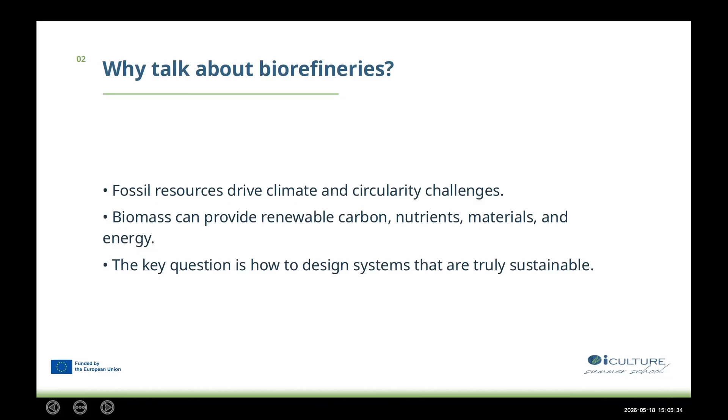We want to move to bio-based resources. Biomass can provide renewable carbon, nutrients, materials, and energy. I'm going to show you how it can be done, but there are challenges related to that.

If you look at biorefineries, a common biorefinery produces a cascade of products, if you want, everything from gas to petrol, to asphalt we're using in the roads, to insulation of roofs, to home gas, etc. It's made by fractionating, so it's a well-established old process, and we know exactly how to fractionate it and make the cascade product. So you don't only produce gas fuel or petrol from crude oil, you produce a range of products.

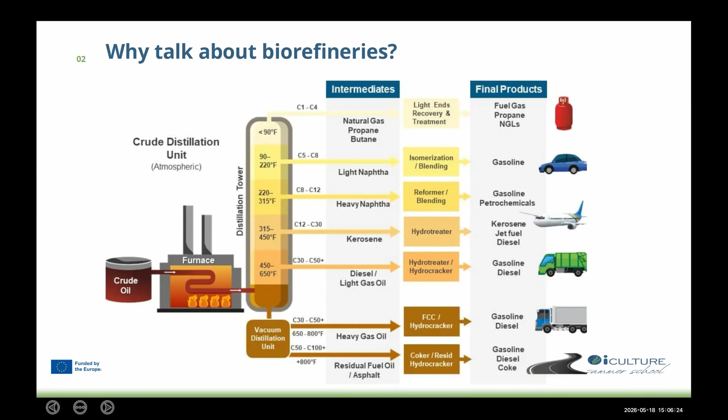I know at least two, one in Norway and one in Finland, but there are a lot of them in Europe that convert biomass into energy. They make bioethanol, we know that. What you really want to do is achieve the same effect they have in oil refineries, in fossil fuel refineries, crude oil refineries. You want to have a range of products.

So basically, replacing fossil carbon is necessary, but not sufficient for sustainability. If you want sustainability, you cannot just convert biomass to energy, as I showed you here. You want to have a cascade of products. I'm going to talk about that soon.

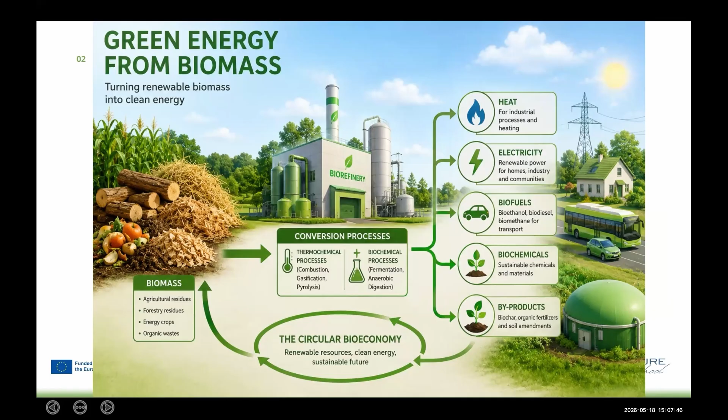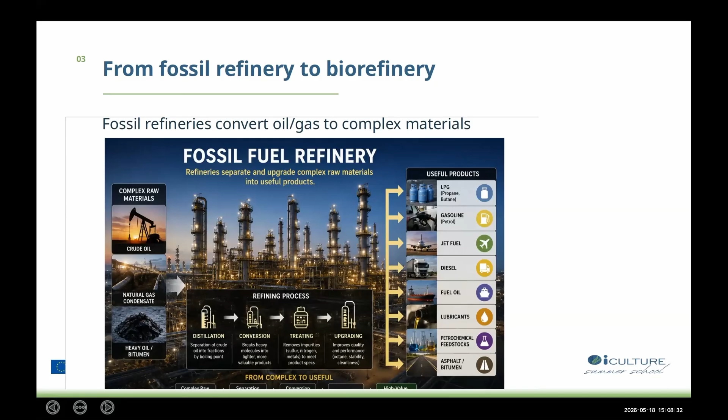So there are tons of challenges, and I'm going to mention the most important ones when you convert biomass to energy, and not only to energy—that's only one part. You have loss of habitat and deforestation. It's known that if you want now to replace fossil fuel, for example, with wood or process from pulp, you want to cut or deforest. You cut the wood and make it into energy. Well, this is a loss of habitat, this is, if you want, damage to the environment.

My colleague, Professor Olivier, is going to talk about the natural habitation and how it is affected by biorefineries.

Then you have the question about carbon neutrality. Is it really carbon neutral? I'm going to talk about that and show you why, with air pollution when biomass is burned. Some processes use part of the biomass in the cascade and burn it to make energy by steam engines—basically driving steam turbines to produce electricity out of the energy you get from burning biomass, but that's polluting the air.

It's competing with food production. For example, take the corn and the soy that is converted to ethanol. It's competing with food for humans, and we know that food is becoming scarce with the years. It's not going to get better.

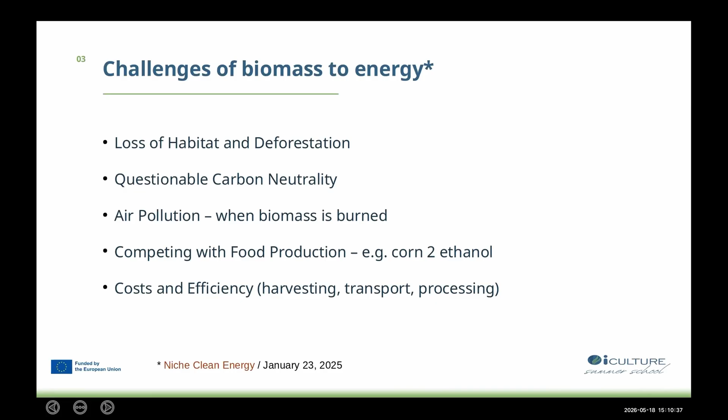Cost and efficiency of harvesting, transport, and processing is very demanding. When it's high, you start trying to get alternatives, which may impact profitability and sustainability. So the challenges I'm showing you are related both to money and environment, not only environment.

Now, when it comes to the definition of biorefineries, it's an integrated system that converts biomass into multiple products. You can look at food, feed ingredients, chemicals, materials, fuel, energy, and residual valorization streams. Because making the high value product is not enough—you want zero waste. Basically, you want to use the entire biomass and convert it to whatever you can to increase the value as much as you can. An example I can give you is brown seaweed, which we are looking at in our project.

It can be fractionated into alginate, which is a high value product used in food and in gels to make gelatin, for example, but not only gelatin. There's also fucoidan and laminarin rich streams, which are basically sugars, minerals, and then fermentation substrates, residual fertilizers, and energy fractionate. So you can use brown seaweed for a range of products, but it comes with challenges, and the product value can differ by orders of magnitude.

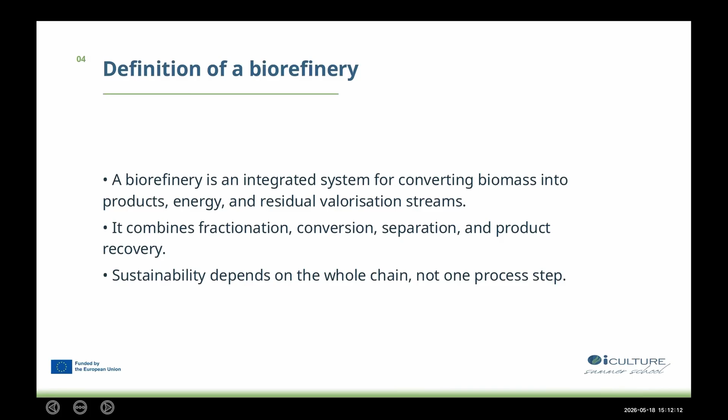Imagine, from high value ingredients, you need to justify the cost of your process in terms of money. Let me show you what I mean. If you look at the process here, the biomass value chain is quite demanding. Let me show you—it starts with the biomass.

When you have cultivation or collection and then harvesting, it requires energy, and then you need to store it, and then pre-treat it. A lot of this is similar to what you see in the crude oil industry. But here you have far deeper challenges—I'm not an oil expert, but storage of biomass can be very challenging, especially because biomass can ferment if it's in conditions different from the optimal dryness or mixture with each other, etc.

Not all biomass is dry, like you see in the picture here. Imagine algae—it's a very wet biomass, and if you take a bucket of algae and put it in your lab or in a room, after two days it's completely fermented and usually degraded, so it's useless. Storage can be a very challenging aspect, and expensive as well.

And then you have the pre-treatment. Then you have extraction and conversion—this is exactly where you want your product to emerge out of the biomass. And then you need to separate it, because sometimes you want the product to be as pure as possible.

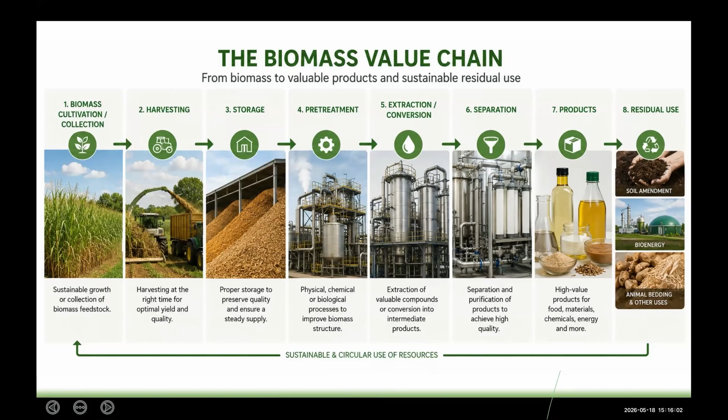Then you have the question of conventional versus bio-based refinery systems. Conventional refineries optimize fuel carbon throughput. Sustainable biorefineries must optimize carbon, nutrients, water, energy, biodiversity, and economy together. You cannot just separate it. The biorefinery needs to think holistically about the whole entire box. The question is where you put the boundaries of that box.

Shall I only look at the biomass itself and disregard how it affects the environment? What happens if I harvest it? The biodiversity? What happens, for example, to the fish when I harvest the brown algae? Are they affected? The blue mussels, and the other animals, there are tons of different animals that live from the biomass.

So it's a bit different than cultivation of corn where you just harvest it. You also have to understand the biodiversity. It's not only about having big fields of corn or sugar cane where you can harvest. Very often they replace what used to be forests or natural habitats of other animals, because people want to grow whatever profits them most. You can see the effect in the Amazon, where people are deforesting in order to grow valuable crops for themselves. So biodiversity is a very important part of it.

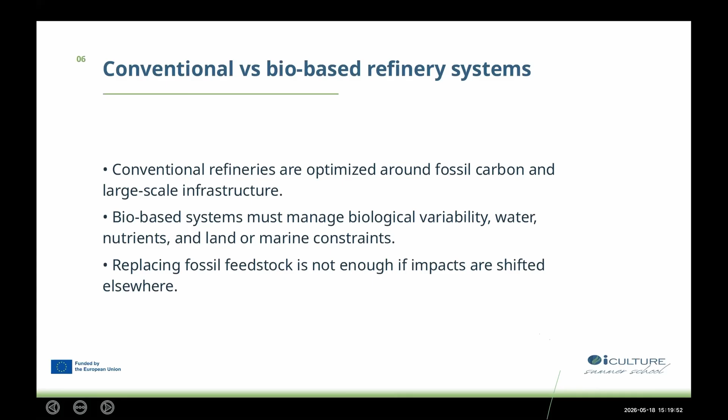So you need to think of the scales themselves. Biorefinery has a lot of challenges, and in scale, the larger it is, the bigger the challenges are.

Let me give an example of lignocellulose. It contains cellulose, and it comes from wood. It's a process where you turn wood into lignocellulose components: cellulose, hemicellulose, lignin. Lignin is the fibers, and there are also extractives, ash, and moisture. It contains a large amount of material you can use for your benefit, and these processes are well established.

Macroalgae contains polysaccharides, minerals, proteins, pigments, salt, and water. You can use all of these to create a really interesting cascade if you know how to design it. Typically, lignocellulosic biomass contains about 30 to 50% cellulose, 20% hemicellulose, and 15% lignin on a dry basis. So you need pre-treatment. It's very important. They are central, not optional.

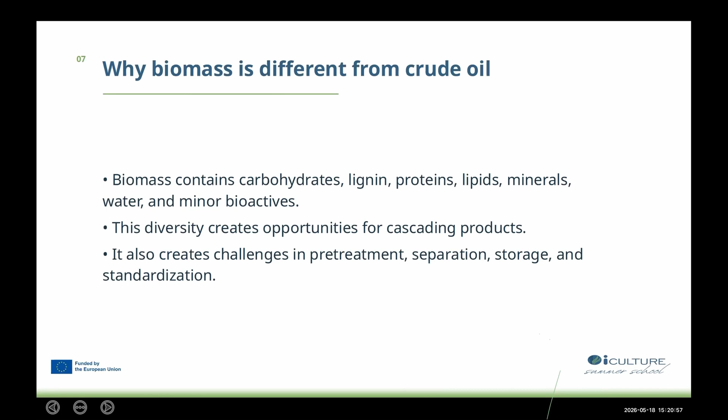So there are several major platforms of biomass in biorefineries. Lignocellulose is one of the biggest, it's quite large. You can create everything from enzymes, organic acids, biofuel, biochemical, to bioplastic.

Lignin is very important. For example, they add lignin into concrete to reinforce it. If you ever use cement for floors, they have fiber added - this is usually the lignin. You can get different sugars from this too. There are a lot of product streams.

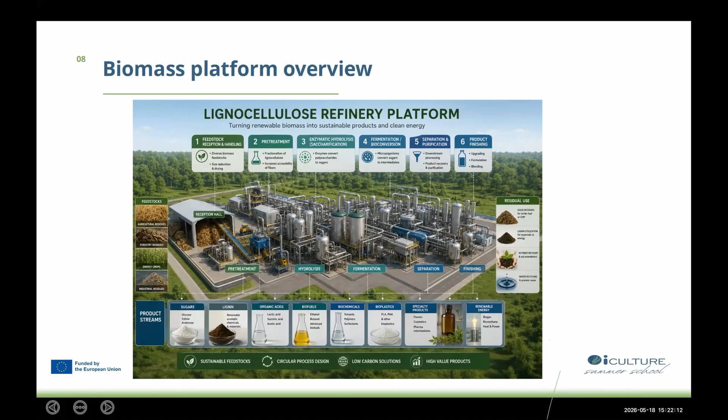This is a very large process. There is one big refinery in Norway called Borregaard. The other ones are agricultural residual platforms - they are very famous, usually making everything from acids and additives to animal feed, etc. And you have the macro and micro algae platforms that usually extract things like alginate, proteins, pigments, vitamins from marine biomass.

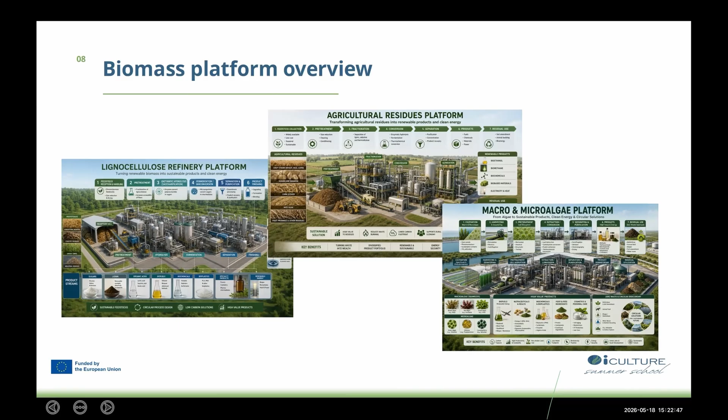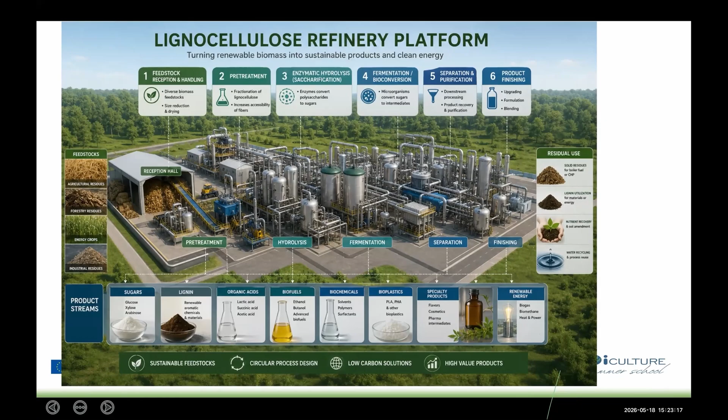When it comes to lignocellulose, examples of biomass are wood, straw, grass, and forestry residual. It's rich in cellulose, hemicellulose, and lignin. It's abundant - you can find it at least in the north of the hemisphere, but also in the south. Wherever you have wood and trees, you can in theory establish a lignocellulose biorefinery, but it often requires intensive pre-treatment and careful logistics, so it's an expensive process.

For agriculture, it's straw, husk, shells, pomace, pruning residuals like pruning of olive wood trees, and processing side streams. They can reduce waste and create regional circular value chains. Competing uses, seasonality and soil nutrient removal must be considered because season in plants is a very important factor. Some plants have nutrients you want to extract, but only at certain times in the year.

For example, macroalgae is very common. In the winter, it has a completely different composition than in the summer - it's radically different. You almost don't find some materials in seaweed in the winter that you can find abundant in the summer. So seasons are very important, and it's true not only for seaweed but also for every biomass.

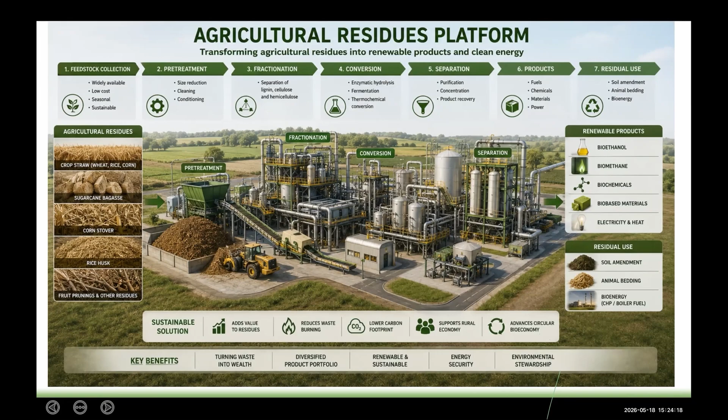When it comes to macroalgae, it does not require arable land. That's very important - you don't need a place to grow them. I mean, you need the sea, but not land. You don't need freshwater irrigation either, which is also very important, and that's why it's very attractive if you establish a good value chain in countries like Africa, which don't have the resources to establish a very large biorefinery.

Examples of macroalgae are brown seaweed, red seaweed, and green macroalgae, which provide polysaccharides, minerals, proteins, pigments, phenolics, and other bioactive compounds.

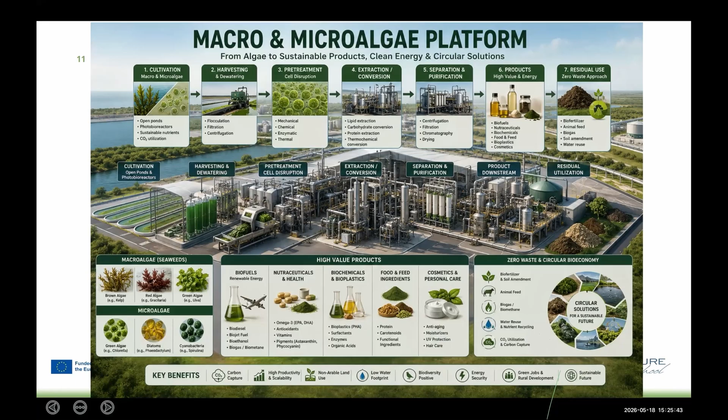Imagine the wet macroalgae contains roughly 89% water - that's a lot of water you need to remove. The dry matter composition can vary strongly with species, season, and location. So what is true for dry biomass, or land biomass, is even more profound in marine biomass. But there is a lot of opportunity there. Although the water is challenging, you don't need land to grow them - the sea is available for now, and you don't need fresh water, which is very important in many countries.

Marine logistics and ecosystem effects must be considered. So there are a lot of opportunities in macroalgae - it's fast growing, almost 4 times faster than regular crops on land, like corn.

You have different opportunities - you can extract high value hydrocolloids, for example, or bioactives. A bioactive is any material that has an activity, like killing microbials, which is antimicrobial - that's a bioactive. Vitamins, for example. So you want to extract them first and then use the remaining carbohydrates for fermentation, fertilizer, or energy. This is how you get the zero waste idea.

As a challenge example, you have high salt and ash content that can interfere with fermentation. So you want to ferment this macroalgae, but high salt is not always good for microbial fermentation - any bacteria or yeast will suffer greatly from high salt concentration, and usually they die. So you will need to do something with the salt, which is the pre-treatment we talked about.

Thermal conversion is a problem too - you need heat, but it's high water content. There is corrosion and downstream purification problems because the high salt will also create corrosion - if you try to move salt water in pipes, you understand what I'm talking about. And then you have downstream purification, which is also a big problem because it's very dependent on the amount of substance you have inside.

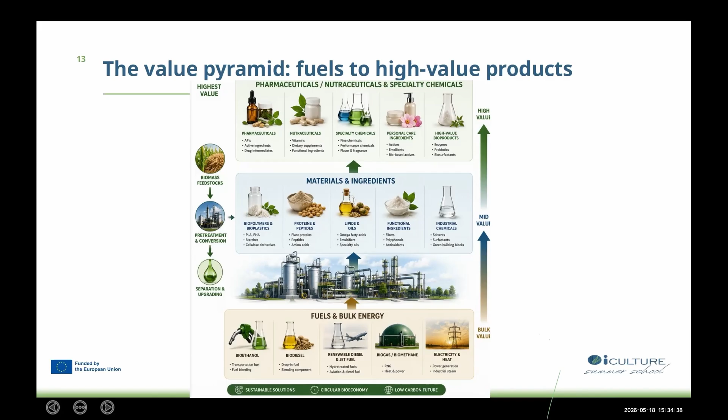You also want to quantify things like how changing the system boundaries can change the conclusion. For example, is this conversion to make this vitamin from this seaweed going to be profitable? Is it going to be sustainable? Is it going to be both profitable and sustainable? The solution is where you put the boundaries.

Very often there's something called gate-to-gate or cradle-to-grave that reveals cultivation and logistic burdens. You're going to hear about this in the next lectures from Theo Crit, who is an expert in the environment and how to make these boundaries. This prepares you for LCA, life cycle analysis: functional units, system boundaries, and impact categories. They're all important in concluding whether the system or biorefinery you want to design will be sustainable and profitable.

Typical sustainability trade-offs are offshore cultivation versus onshore. Offshore cultivation may avoid land use, but may affect marine ecosystems and require marine infrastructure. Another example that is well discussed today, also in my project.

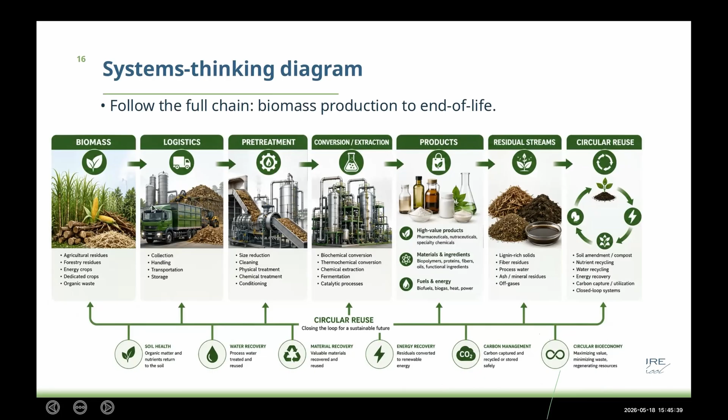The logistics, the pre-treatment, conversion, extraction, the product, the residual streams - take care that in the end you will not have anything left over. You have to have buyers for all the products you want, and suppliers of the biomass. You need enough biomass so this flows continuously - not just that in January and February, for example, you won't be able to get the biomass because the material you want to extract doesn't exist then. So you need a continuous flow of material, which means a supply chain is very important.

Bio-based does not automatically mean sustainable - not if you are destroying a large part of biodiversity, or when you're harvesting the seaweed and you kill a lot of fish in the process, or if the transport with boats or trucks doesn't qualify as sustainable, or if you want to use a lot of fresh water and this is damaging the environment because then you have to take the fresh water from other places.

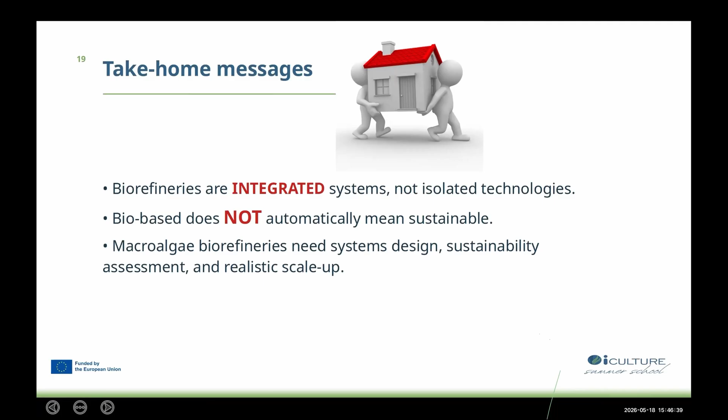Macroalgae biorefineries need system design, sustainability assessment, and realistic scale-up. The scale-up is a very important part - it's about the scales. One thing is to make things in the lab, another thing is actually producing it in large amounts of tons. We're talking about 100 to 500 tons a day, and this is still considered small scale compared to many of the processes that companies are using.

The discussion question you're going to ask yourself, and hopefully answer in this course, is which product pathway should macroalgae biorefinery prioritize - fuels, materials, high value chemicals, food and feed, or residual valorization? If you can answer this after the course, you are halfway there. It means you will have enough tools to understand when it's better to make materials, when better to make fuels, high value chemicals, etc.

How would your answer change if biomass availability, market price, and environmental impact become the limiting factor? Because it's not always about your biomass - sometimes it's about the market and the market demands and needs. So if the market needs change, does that mean you need to close down your company, or can you just make small modifications to adjust for these market needs? And the same with environmental impact.

And with this, I will close. Thank you for listening, and if you have questions, please do ask.

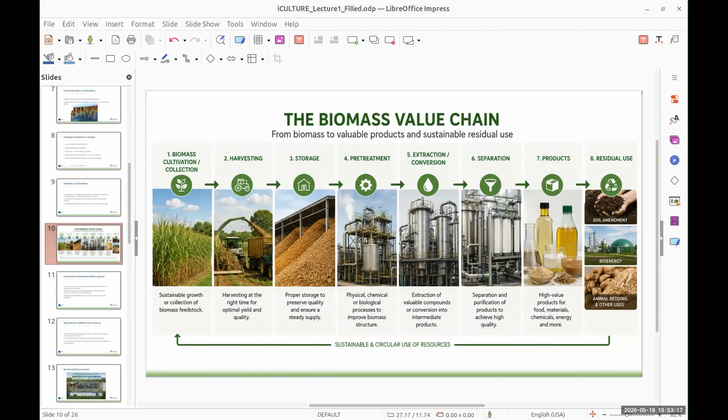Does that answer your question?

One question is: as a master student of marine sciences, what skill should I focus on mainly for securing a good career in the field? When it comes to marine sciences, it depends on what you study. If you study biotechnology in marine science - and marine science is a big topic in our university - if you're in the biotechnology part, you can focus on products.

Marine science can also be what you're going to hear next from Olivier - basically habitats, the different types of seaweed you have, macroalgae and microalgae, and then you're going to focus on the biomass part rather than the extraction process itself. But don't forget that it's very flexible. If you're in marine science in general, you can easily end up in any of the stages you've seen of the biorefinery process, so that's good news because you can actually converge to something you actually like.